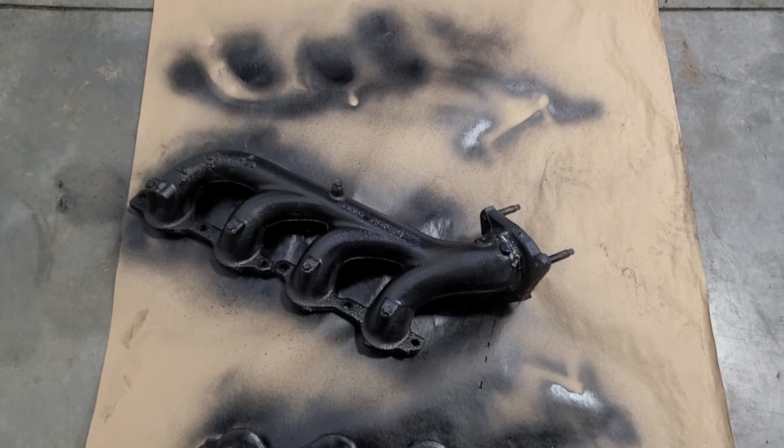Anyways, I'll give you a little walk around and start on some things to keep progress rolling. So these are the manifolds. In case I don't get that video back, I cut the flanges off on a wedge shape, reoriented and reclocked this so it doesn't hit the frame rail, and realigned them so they basically work for my application. Then I just threw a quick coat of header paint on them that I'm sure will only last like 5 minutes, but that's okay.

They're welded inside and out, 2 passes on each one, MIG welded. These are cast steel, so not cast iron, so as long as you clean up the area, you can weld them fine with just a MIG welder and get good penetration. My drive shaft is here.

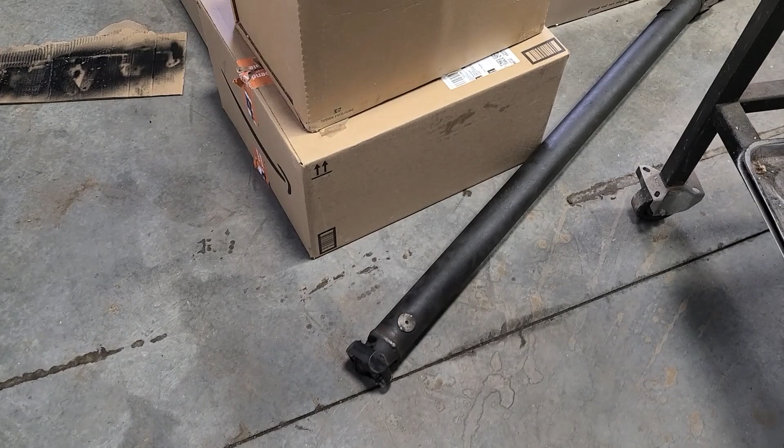I should jam that in because it's in the way. The only thing I had to do was, while I was away, I had a friend of mine get a conversion joint for it, and he put in the conversion U-joint, so it converts it from the size U-joint that was in the truck to the size for the LS.

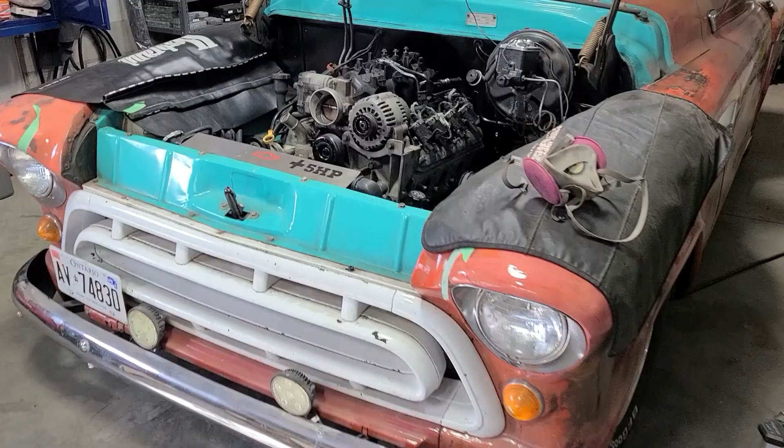Lots of parts, my harness stuff, which I think is what I'm going to start on. This is all my fuel system, fancy dash, shifter, that sort of thing. What I did do that I didn't record was the radiators installed, accessories are on. I have clearance from the power steering pump pulley to the power steering box, so that's good news, that's really good news, actually.

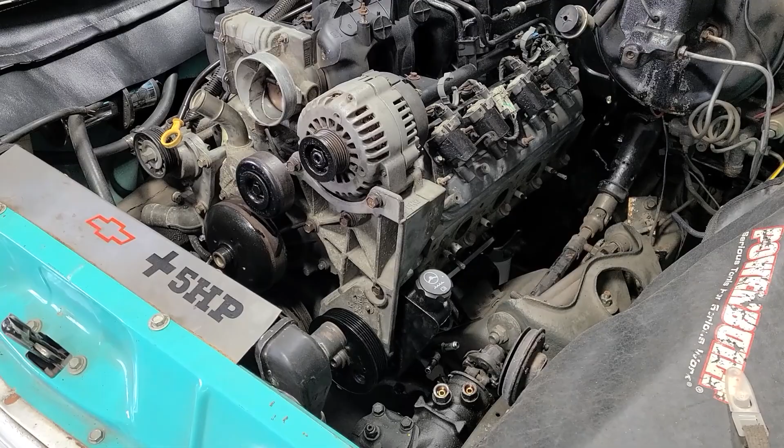Like I said, the manifolds now fit, so I really need to start tying this together. Lists are very important, I have a giant list of things to do. They're very important to keep you on task, and I guess I will just keep working.

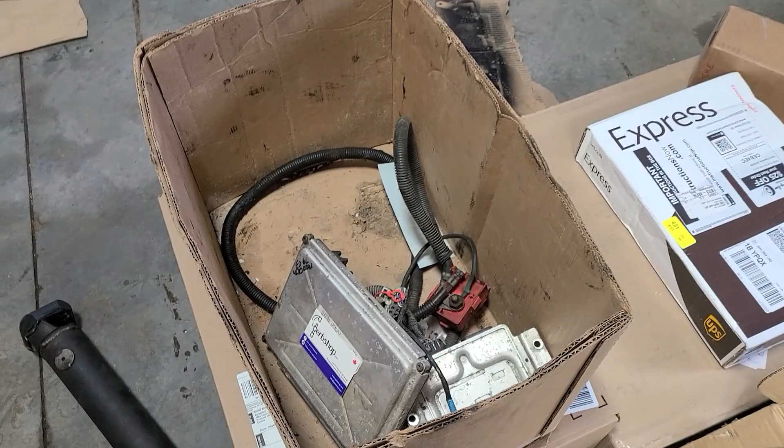This is my harness all stretched out. This is the harness that I had reworked by a local shop that's all they do. I've got a nice fuse box there. You can see I've got to clean up all these things and get ready to install them. I just got to start figuring out where all this stuff goes, which is kind of going to be fun.

I think a nice easy spot to start would be, I know all these coils have to get plugged into something, so I could start there. I don't know.

Yeah, I got to figure out where that's all going to go, and this is for the engine specific harness. This is a factory harness that's been reworked for my application, but I still have the engine harness, and then I've got to make the stuff from the truck work. So I know that doesn't really sound very clear, but the big thing is to lay this all in, and then I've got a little instruction sheet that tells me what I have to get power to, what I have to ground, all that sort of stuff. It doesn't really look like there's that much to do besides find out where all this stuff plugs in and plug it in.

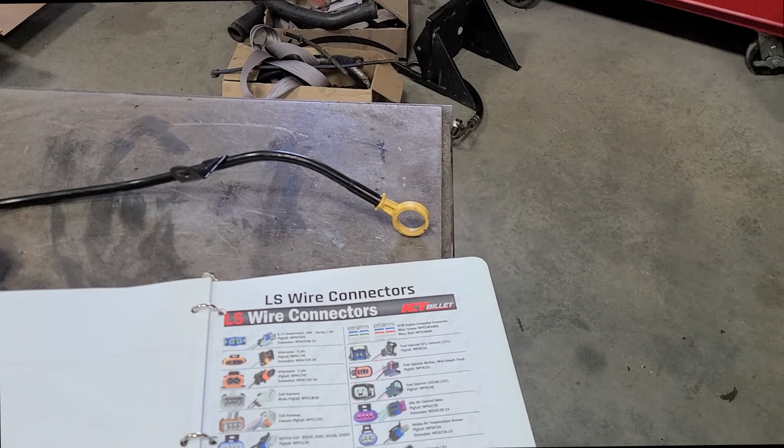Okay, so one thing that will come in handy, if you go to the ICT website, ICT makes a lot of good products. I have nothing to do with them other than I buy their stuff sometimes. They have this complete LS swap guide by ICT Billet that you can download and print. In the back of it is what all the connectors do. So this is very helpful because I have zero idea what I'm doing.

My last swap, the harness was already done for me and on the engine. So what I need to do is, or what I needed to do was find one spot to start.

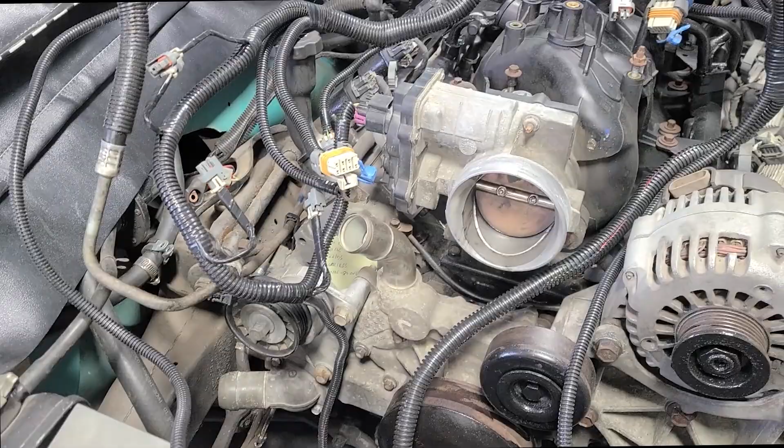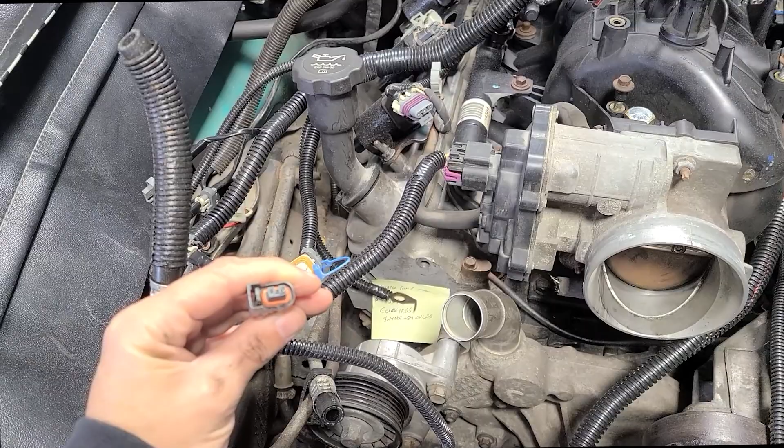So the one thing that was easy for me to find was the drive-by-wire plug. These little guys are for the injectors, so that would make sense. Now I can work my way back. This might not be the right way to do it, but this is the way I'm going to start anyways. The injectors each have a plug, so now I can work my way back and dress this through this loom, or through this deal here.

Presumably my coil, that's probably my coil connector, that goes right here to my coil pack setup. So I can work my way back from here, and then I can see which way the harness is oriented and work my way around.

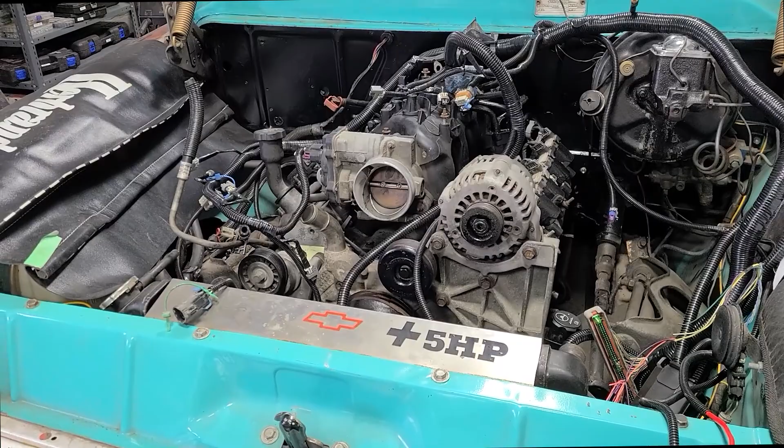It looks like my harness has been laid out for the computer and fuse box to be on the driver's side. I didn't specify that one way or another, probably should have. But there's enough loom, I can probably make it go wherever I want. I'm going to get everything on the engine first and then decide what I need to do to mount the harness, the computers, the fuse box, and all that stuff.

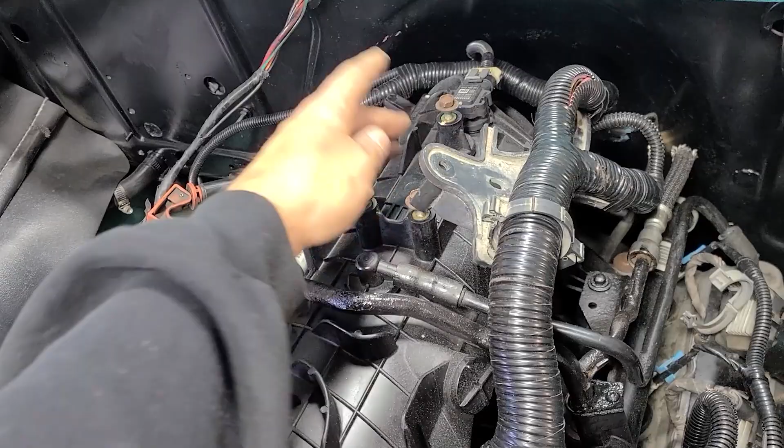Okay, so I'm making some progress. The good thing is I took some pictures beforehand, which was helpful, but things have changed, so it's not exactly the same. I've got the injectors all connected. I don't know where this main loom goes. This thing here bolts onto one of these somehow. I gotta figure out how that goes, and that'll determine a lot of stuff.

There's a pigtail that goes down to the transmission, and a whole bunch of stuff for the transmission. There's one that plugs in on the back of the manifold. There's a temperature, I think that's a cylinder head temperature probe there. I think I found the drive-by-wire one, and there's an oil pressure thing I've got to plug in. It looks like this guy. I gotta find where it goes.

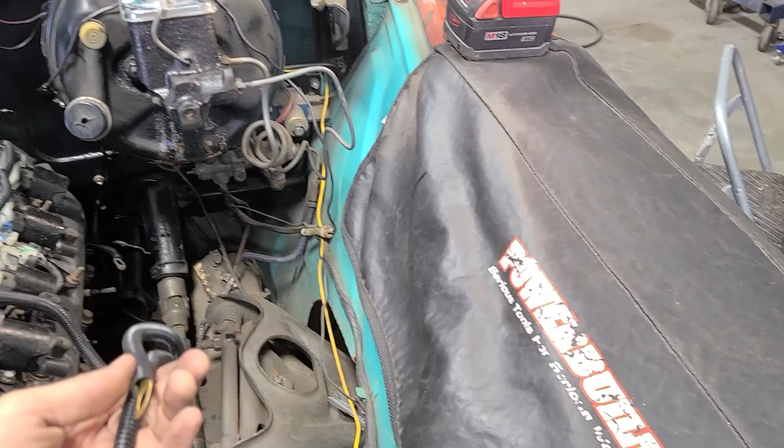So I think I'm gonna put the truck up and look underneath and maybe start doing the underneath connections. Other than that, this guy here, this long thing, I think is the mass airflow for the air filter, on the intake, I should say. So it comes together pretty quick. This is for the O2 sensor, there's one on each side.

The big thing is picking a starting point for me. I picked a starting point at the throttle body because that was easy, and I worked my way around. I found where the harness clearly goes down below. Even if you don't use the specific guy I used, there's a lot of guys wherever in your area that can do this sort of thing with harnesses, and they kind of rough them in and set them up. My Malibu one was similar, but the only difference was it was already on the engine when I got it, and I picked up the engine running. So this one's a little different situation, but it was also cheaper.

So I don't know what this is. That obviously is a ground of some sort. My plug-in for my harnesses, my nice little fuse box he gave me. So I'm going to put the truck up and connect the stuff that's underneath and try to get it out of the way. The one thing you want to be mindful of is exhaust. Where's your exhaust going to be, right? You don't want your exhaust touching these wires, and you want to dress it as tidy as possible.

I've got to figure out, like I said, how this goes. I can't really see it on the before pictures I took. So I may have to get the little bracket that goes here for that intake cover and look at it, and worst case, get it with the Google.

So this is underneath the truck. This is all my transmission-ish stuff. I gotta figure out where that oil pressure guy, this guy, where this guy here goes. I don't know, I don't see a spot for him, but I'm sure there is one, I'm just not seeing it. Maybe this gets plugged into something that looks like an oil pressure type thing, a different type thing.

So let's just look for the obvious examples. There's a round guy, got a round guy here. Get a light closer.

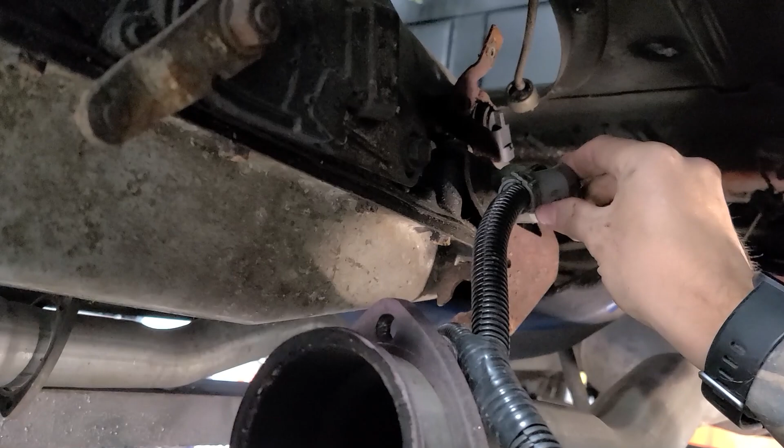So I'm going to look for the obvious examples, and I'll take the round guy. How does that go? Is there a right way or a wrong way? Yeah, it only goes one way. That's the nice thing about a lot of these connectors, they only go one way. And when they go on there's a nice little pop, of course I won't be able to show you that.

Let's see if I can get this guy. You don't want to force any of them, because if they're not quite right, then they're not right. This one should go on just like so, or not. See, it's okay, it has a little tab on one side, not on the other.

So now look at that connector. Oh yeah, it's got a tab on this side. So that's what I'm saying, they kind of only go one way. Bang, hear that little click? And then this wire here probably goes to this one.

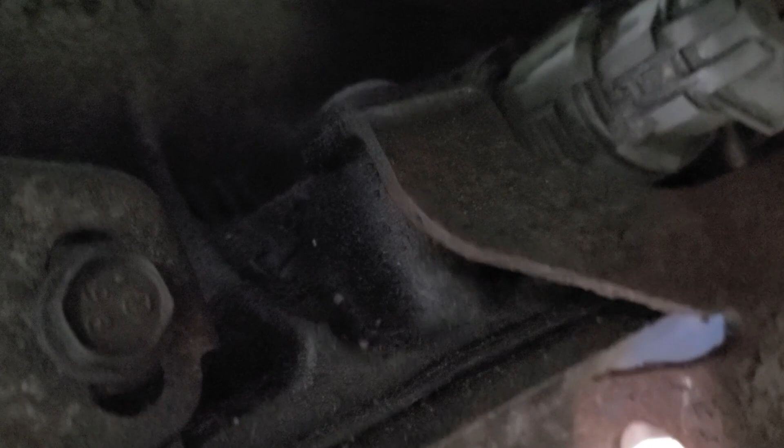Making you all dizzy. Looks like, I don't know what it does, but it looks like it goes in here. Yeah, it goes in with a nice little click.

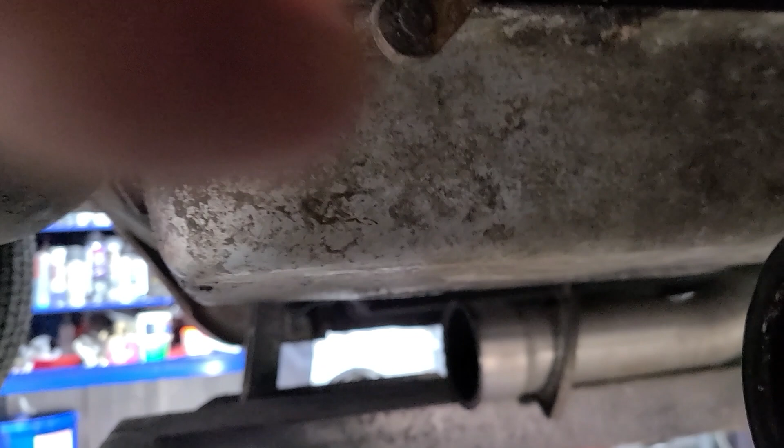There's the main plug. The main plug goes on, looks like it goes on like... nope, see those, you don't see, because it only goes on one way. Those little nubs have to line up with the slots, so it doesn't go on that way. It goes on this other way. Should be a nice little click when it's in right.

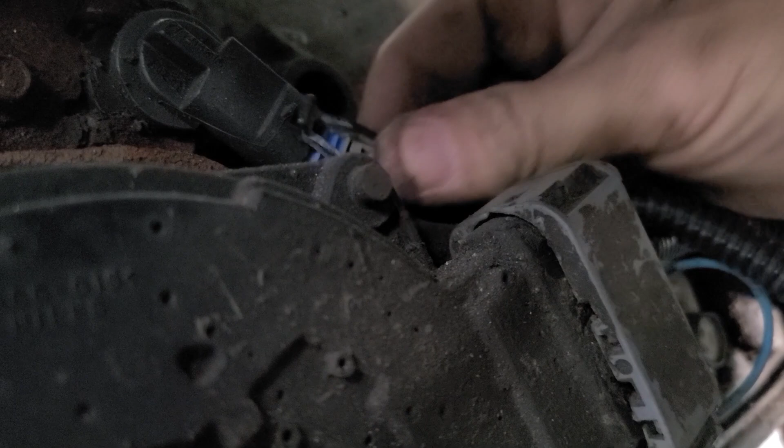Oh no, this one's got this guy here. So you push this in and you push this up, and then it doesn't come off. Isn't that handy? What else we got? We got one more up here, and it's nice to know what these things are, but I don't know what they are. As long as it's only a problem if you're missing something.

So this guy, that's the transmission plugged in. Transmission's completely plugged in. I'm just going to get this last one, you can see where the loom goes. And once the exhaust is on, you want to make sure that's all clear and not a problem. I can get rid of this because this is the old speedometer cable that's not needed anymore. So that's the transmission hooked up, like 4-ish plugs.

This guy here, what's this guy do? Oh, that's the O2. I'm pretty sure that's the O2. Yeah, that's the O2 sensor.

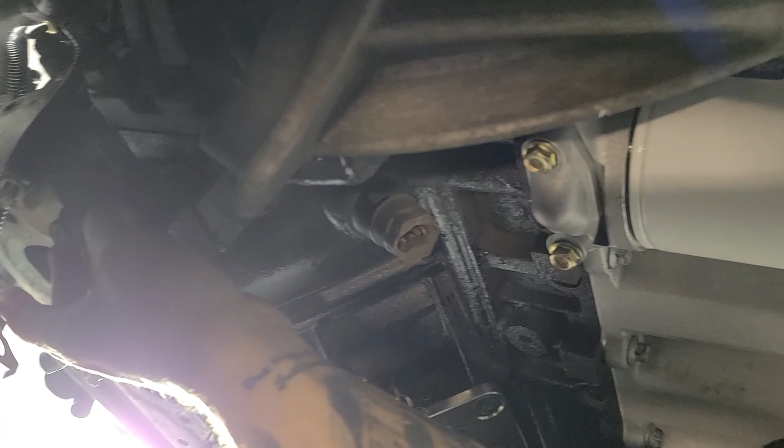These are like a triangular type guy. So, I don't know where, the only one I haven't found yet is this one here. I haven't found where he goes. I do see there's a nice spot. This is going to be confusing. So I haven't found where this guy goes yet. I'll have to look, but I see there's this ground, there's a stud back here that it can go on. So I'll probably put it on there.

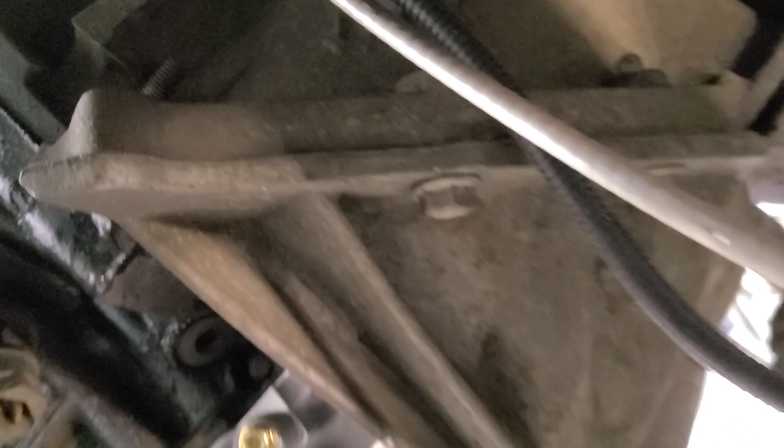When I install my shifter, it'll get connected to this. This is, I guess, I don't know what they call it these days, but I'd call it like a Prindle switch, your park, reverse, neutral, drive, low switch. That's what controls your thing going in and out of gear. I have a mechanical shifter that's going to directly connect to that, so that'll be interesting to see how that goes. But that's the transmission hooked up.

This O2 is going to plug into the O2 sensor on the exhaust. This is really not that hard. Now I did pay a bit of money to have this harness pre-done for me, so that was handy. What I spent, I'm saving in time, and I don't have to be an expert on LS wiring to plug things into where they go.

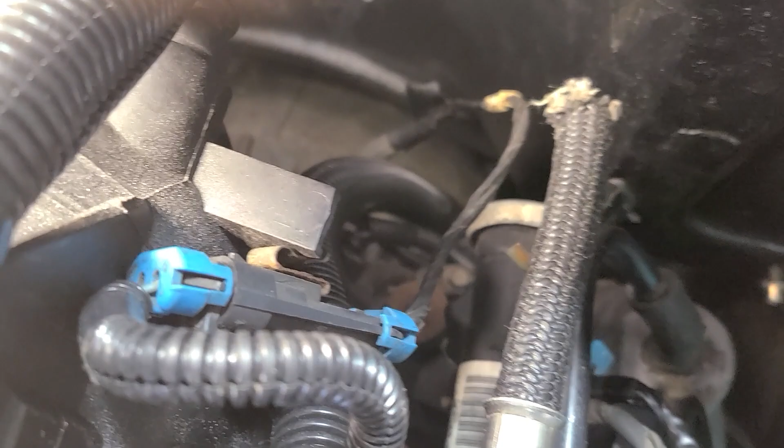Okay, I found where this oil pressure switch is. This is the back of the intake manifold. You can see I had this one plugged in, this 2-wire, but then there's an oil pressure switch with no plug in it. And the plug that I couldn't find a home for, that's right here, is that same size. There's also a stud back there to put that ground on that I had.

It's important not to leave it, because that little wire is really easy to connect, or to not connect and to miss.

And then if I went to go start it, maybe it wouldn't run right, or it's certainly not going to read oil pressure. I'm going to think I've got no oil pressure. That's a bad deal, especially when I was into the oil pan and stuff like that.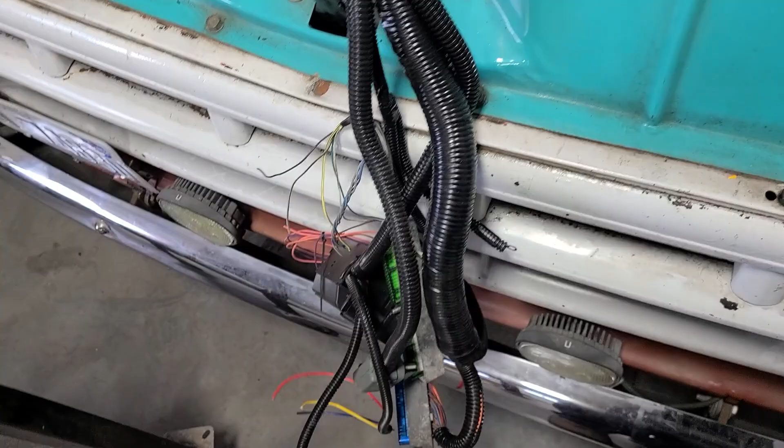So I'm going to plug that in now. It's important to not miss anything and make sure that you plug everything in. Once I get that and that ground back there, that's pretty much the entire back of the engine other than the O2 sensors. Then it's just all this crap up here, which looks like a lot, but it's not really, because this plugs into something, this plugs into something, that plugs into something.

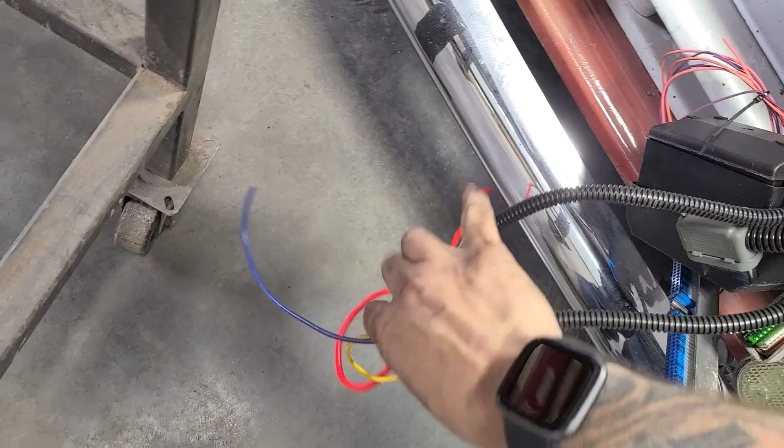Then it's just this, all the wiring. And these guys, some of these go to my OBD port. I gotta put the port on - he gave me one to put on. It's kind of nice that he did it this way, even though it's a bit more work for me, that he gave me the wiring for the OBD port and the plug so I could install it in the truck. Because what I had to do with my Malibu was the plug was already on it and I didn't want to screw with it, so I had to use a big hole to get it through the firewall to mount that plug. So it's easier this way - I just have to have a hole the size of these wires.

Now if you've been following the build on this truck, you know that I'm not short on holes in the firewall to put wiring or whatever the hell I want through. So that should be okay. But I'm gonna get that oil pressure thing hooked up, get that ground on, and then really it's just figuring out how this sits on top of the engine properly, because I might have to just Google and see how that goes on this particular truck engine. And then once I have that, I can decide where this harness is going to naturally lay, which I'll have to build a shelf or something to hold the computer.

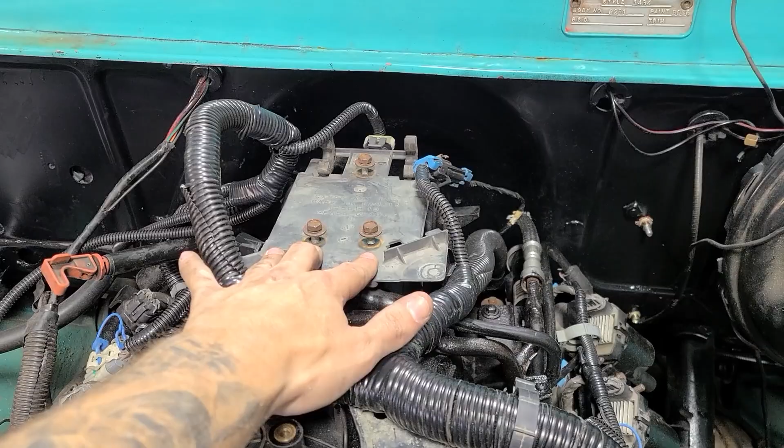Okay, after some Googling and looking at pictures and trying to identify what's what, it goes like this. This bracket goes up here. This is the bracket for the cover, and the cover just clips in and goes down and then screws into this.

So I need to clean this up because it's still cruddy. Clean this up, and then it looks like everything for the computers and stuff is going to be in this area. Which is fine actually, because I think I have less room on the other side. The battery goes up on the firewall in this truck, so it's not too bad that way. But I'm going to have to build some sort of area or something for stuff to sit on, like the fuse box and all that stuff.

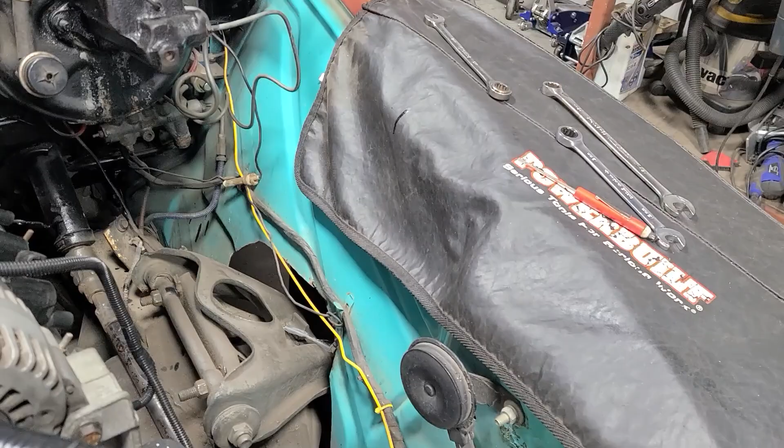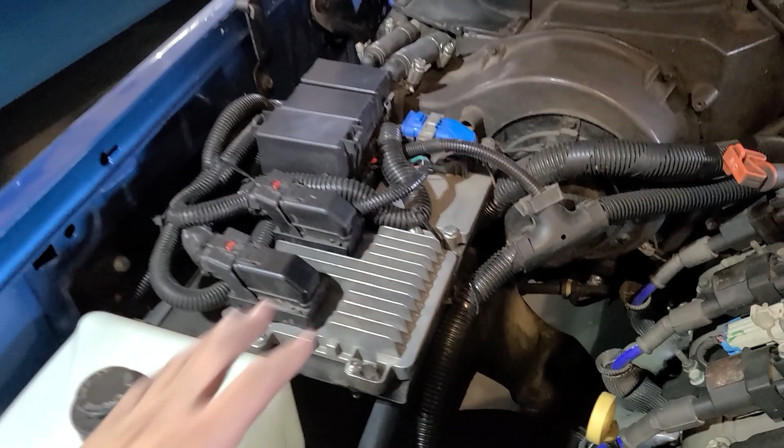On my Malibu, I did a shelf. Actually, let's go over and I'll show you what I did on the Malibu. Okay, this is my 1981 Malibu with a Gen 4 LS, a 5.3. You can see everything is very tight in here, but I built this shelf. It's a Gen 4, so I guess it had the same amount of things, just a different plug configuration. It's got the, I believe this is the engine computer, and that's the transmission computer, and then this is the fuse box. I did a whole series of videos, like 30 videos, on putting this car together.

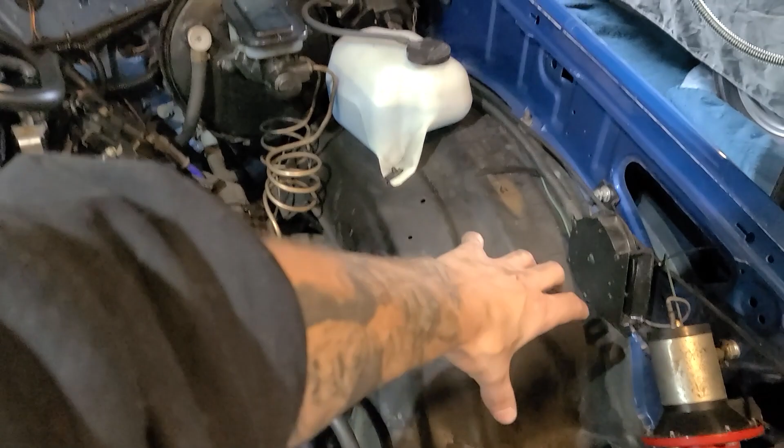But this shelf here that I built is probably something like what I'm going to have to build for the other one, for the truck. You can see on this one, the harness comes all over here and sits nice and tidy. This other one is set up like the factory location, so it'll come across and behind the alternator, and I'll probably put stuff over here. You can see on this one, I didn't have a lot of clearance - I've got 3/8 of an inch between the pulley and the steering box. I don't have that issue on the truck, but I'm using the same pulley, the smaller reduced pulley, and stock accessories, the same as I did on this Malibu.

Now things are starting to make sense. So I cleaned up these brackets and put them on. Sort of all fits. This guy here, this computery looking box deal, whatever this is...

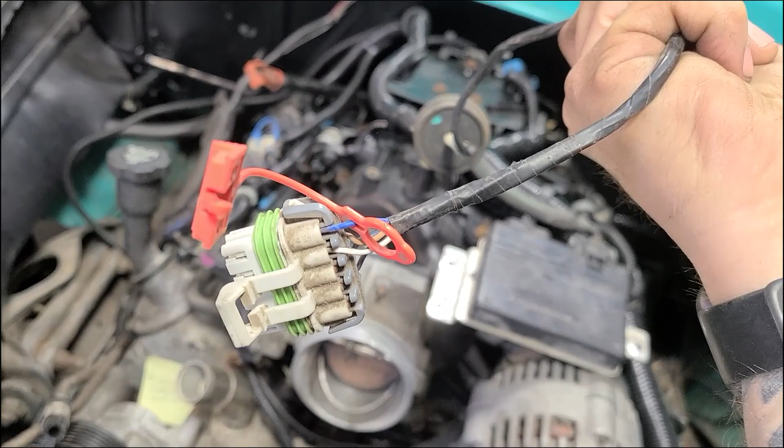This plugs into my drive-by-wire pedal, this guy. This grommet obviously goes through the firewall somehow. So when I'm positioning where I'm going to mount this, it has to be within proximity so I can get it, basically make it to the pedal without having to splice wires. That's the easier way to do it. This guy here is going to go probably to this, yeah, it goes to this. So I've got the length of this and the length of this to get me to the pedal.

So if I mount this box somewhere like here, I'm probably fine. So I'll probably do that. It's sort of naturally kind of laying there.

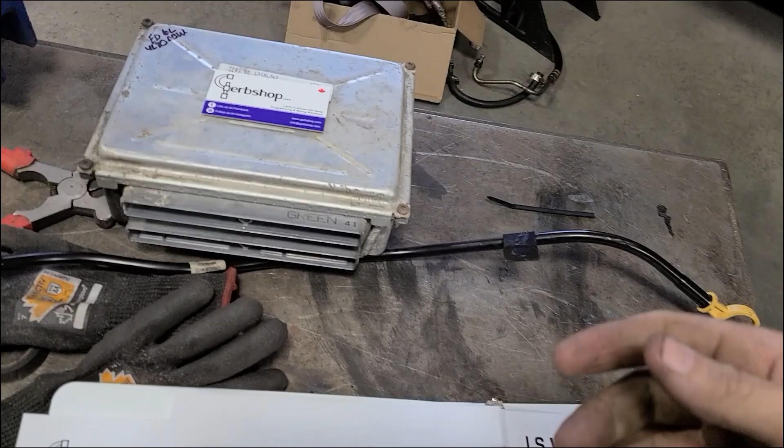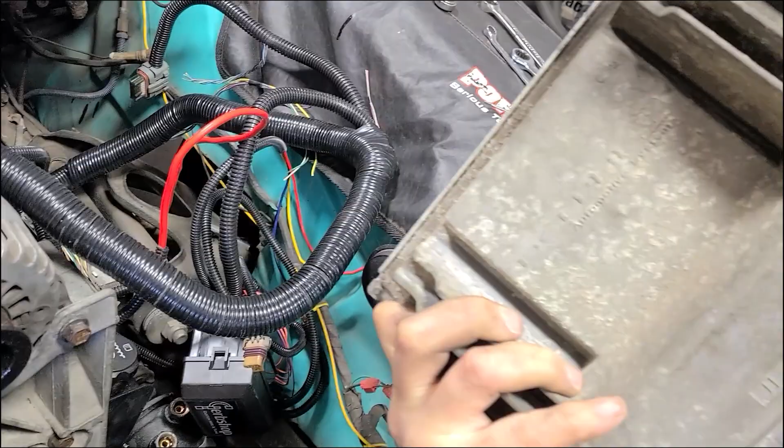This guy here, these guys, plug into the main PCM. So I have to mount this PCM somehow. And I don't see any holes in it or anything, so that's kind of confusing. I'm not really sure how I'll mount this guy so that it's going to actually look okay and be secure and all that good stuff.

So I have to mount that. It's going to go somewhere in this area as well. And then this fuse box will go somewhere in this area. I'll have to figure out... Oh, I think I decided this was the...

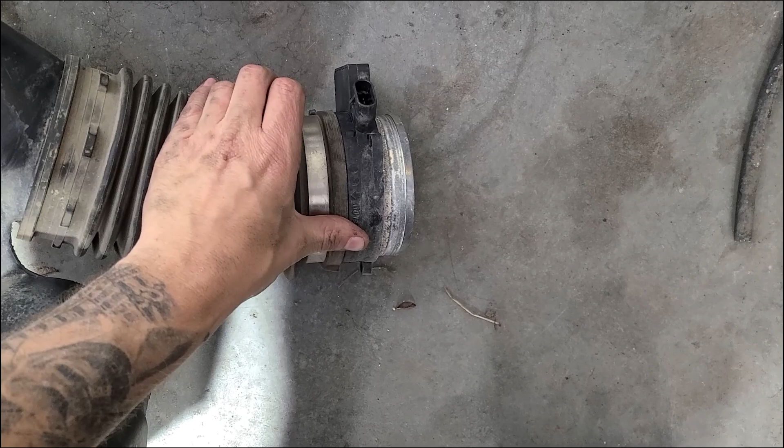Yeah, I think I decided this was the MAF, the mass airflow, which is... let's look at it. This is the factory intake. Yeah, so this is the mass airflow here. So if I'm building an intake like I did on my Malibu or something, I have to incorporate this mass airflow in there and then plug that in.

Or, you know, I could repurpose this big giant plastic air filter. The downfall with the open air filters is they sound like crap to me when you honk on it. It sounds like the old school flipping the breather upside down on a 350 Chevy or something. But the upside is they look good. This doesn't have that sound, but they kind of look like crap and they take up a giant pile of space.

So I'm not really sure what I'm going to do there. Probably I'll just make something like I did on the Malibu. As for performance gains, I don't really care. You're going to get a marginal gain for having an open air filter versus having this. For this application, it's not a race truck. It's going to have way more power than it was ever supposed to have anyway, so it doesn't really matter.

So that becomes the hard part. What I'd like to do with this, which is what I did with the Malibu, is put the rad hoses on first, because the rad hoses are a little bit harder to deal with than the intake, and then you make the intake go wherever it goes, wherever you have space left. But I'm getting somewhere with this, so that's okay. That's good. And then I have to get the cover.

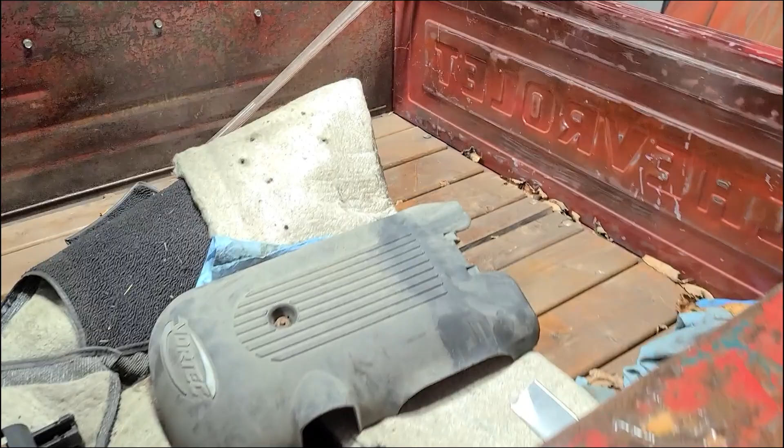This cover here, see, it just clips into that back piece and folds down. So I'll clean this up, and it'll be nice that I can actually fit that on this one, because I couldn't fit that on the Malibu due to hood clearance. But I'm making one for the Malibu.

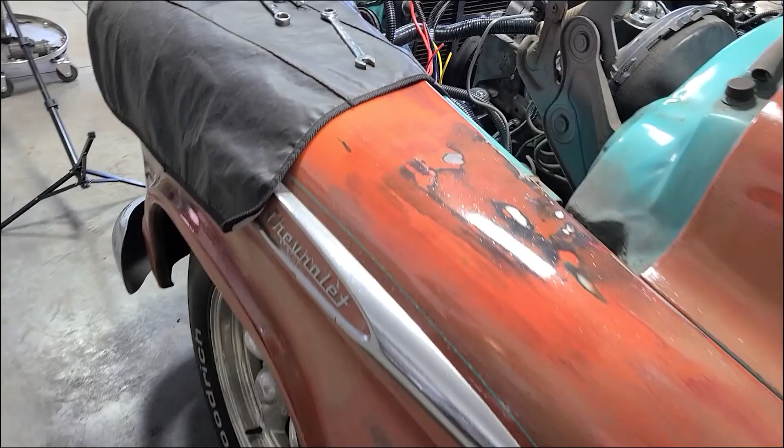It's coming like Christmas. So I guess the next step is to just kind of figure out where I'm going to put stuff now that I've got things kind of sorted. I know what things are now. Process of elimination is a wonderful thing.

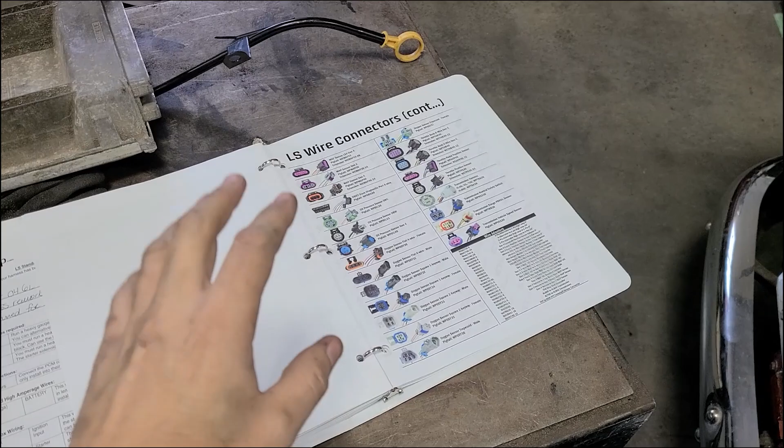I can't recommend this enough, this ICT book. Like I said, the only thing I bought from ICT is their engine mount brackets that are down there. However, they were my go-to stop if for whatever reason this power steering thing didn't have clearance. I was going to get the whole bracketry that moves everything inboard. You can see my crappy paint job.

So I guess I'll keep looking at where I'm going to put stuff.

Okay, so I have the wire running for the drive-by-wire pedal. I made a grommet that goes down in there. This is sort of got this kind of figured out. What I think I need to do, I don't know how I'm going to get them out. These screws are pretty seized in. I need to get these screws out.

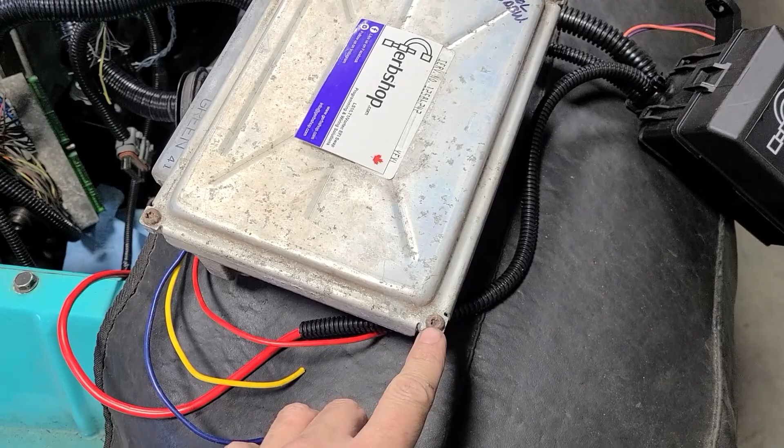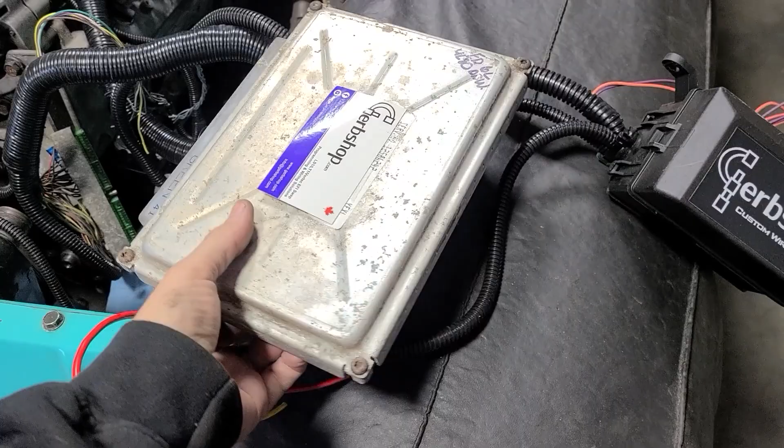I need to make some sort of bracketry with the sheet metal on my brake so I can mount the PCM somewhere right there-ish or something. Once I make the brackets, I'll be able to determine better, but it's not like the Gen 4. The Gen 4 has holes that go through that you can use to bolt. Gen 3 is different, so I'm not sure how this would have went with factory, but I'm going to try and get these screws out, and then I'll make a little bracket for that to mount.

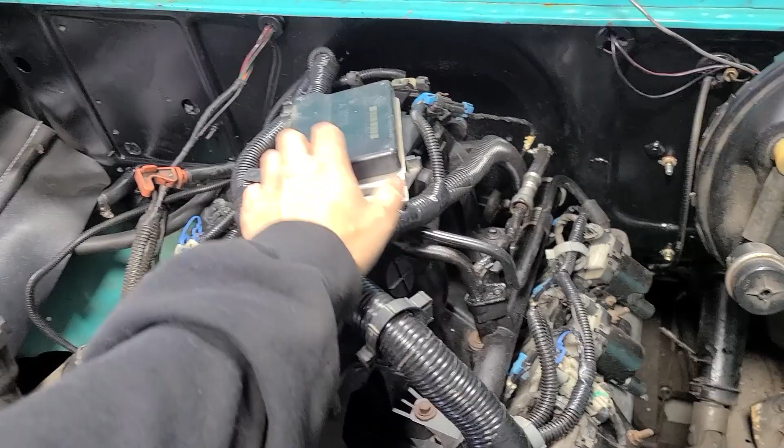This guy's easy enough, it can just mount anywhere. That's for the drive-by-wire pedal. And this fuse box just has a couple of holes in it.

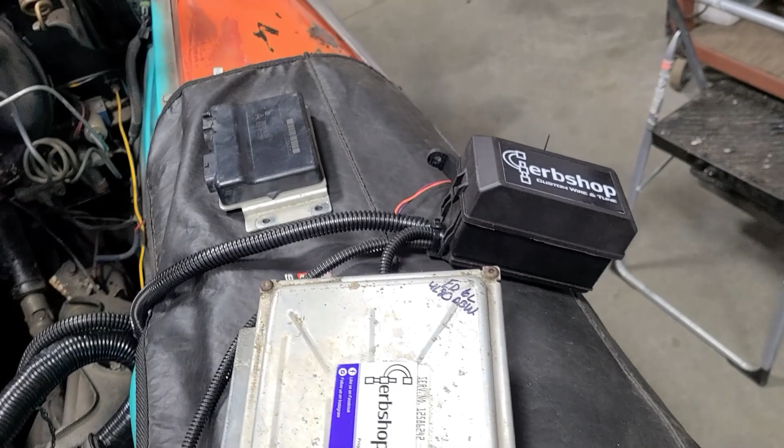So not sure how far I'll get on this video, but I'll keep going and I'll stop when I stop. I certainly won't get it all done. But fortunately, the guy gave me a nice set of instructions. It tells me what it is that I need to do for the various things, some hints and tips.

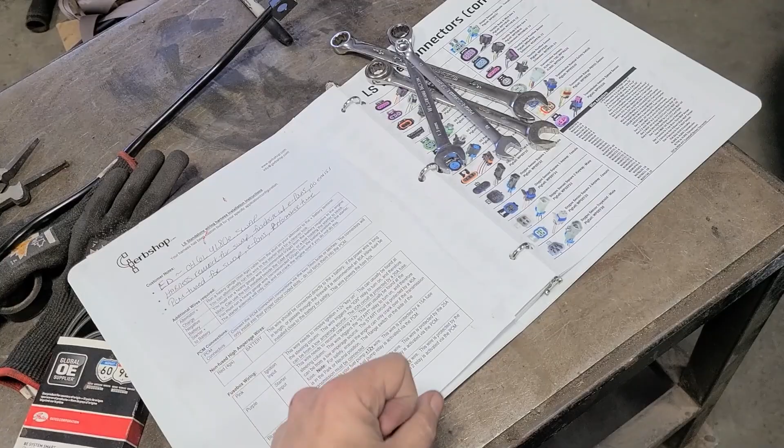The guy that I got this from, which is a different guy than the one I got the one for the Malibu from, also gave me a set of instructions. Not quite as pretty as this, but also a very good detailed set of instructions that was obviously a contributor to my success. So I'm going to try and get these out and figure out a way to mount this.

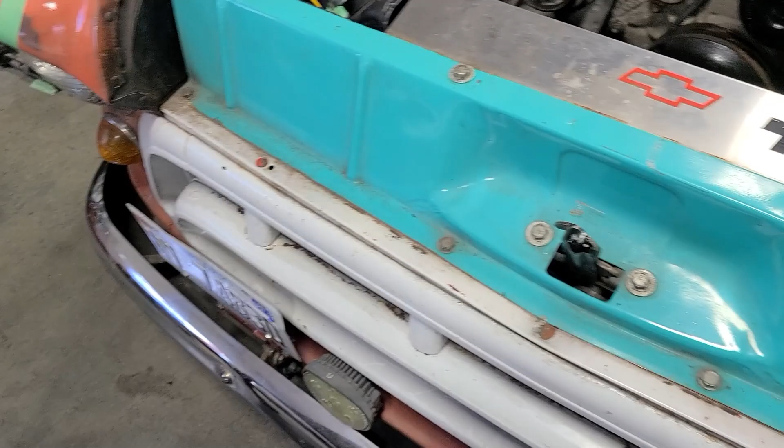And so this guy here goes, let's just look at that for an explanation. So the wires that we have, the fuse box wires, this big red wire - 14 gauge, no, that's not 14 gauge, it's bigger than that, it's 4 gauge.

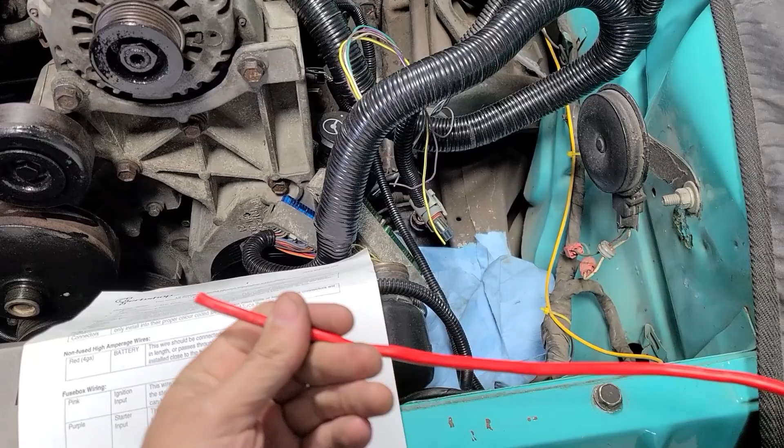This non-fused red wire says to connect directly to the battery, and if it's going to be any length, which it probably is, any length longer than what it is, it should get an 80 amp fuse. So I'll probably put an 80 amp inline fuse in it. I'll put that on my note to buy.

That's the wire that powers the fuse box. The pink wire that I've got here is the ignition input. Purple is the starter input. This blue one is for the electric fuel pump output, power to the fuel pump. The yellow is for one fan and the red is for the second fan. So that's very easy.

That's the one for the battery. So just to recap, this goes to the battery, and if it's longer than a couple of feet you want an inline fuse. I put an inline fuse on the Malibu. The pink is for the ignition input, purple is for starter input. My yellow here is for my one fan, red's for the other fan, blue is for fuel pump output.

Now that's going to be different - these ones will be different depending on who did your fuse box, it could be any color. But these ones here, the pink and the purple, should be the same no matter who did it, because that's the GM wiring that's just reused.

The other thing that I've got that he gave me provisions for, let's just look at what this pile is. I'm figuring it out as I'm talking to you. So the white wire he gave me is for the tach. The brown wire is for the check engine light, the MIL light. The green wire goes to the OBD. And the yellow wire is for the vehicle speed sensor.

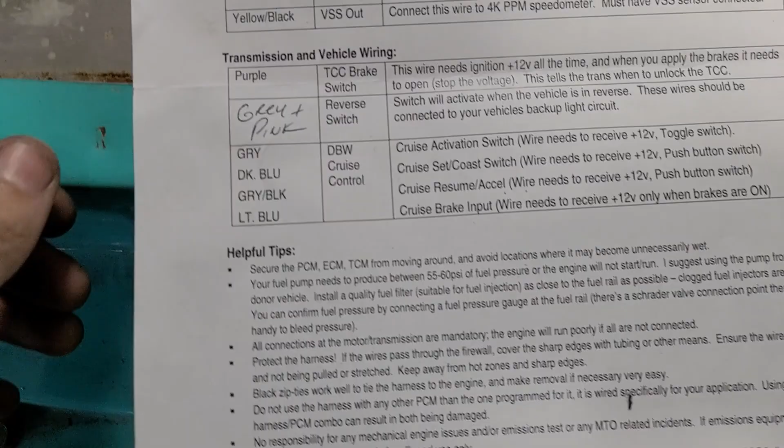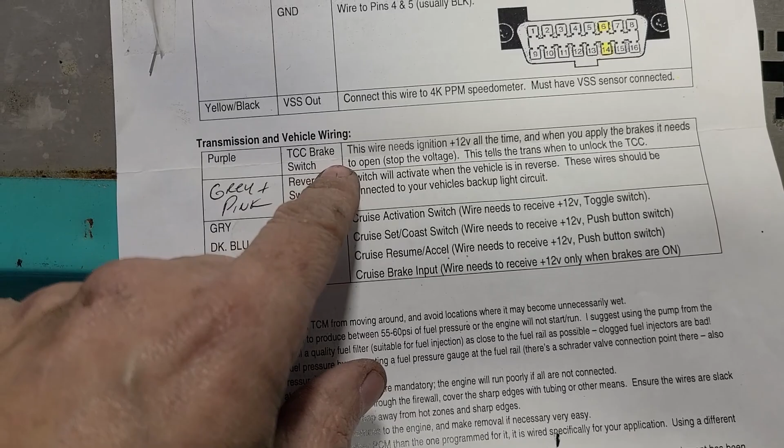Transmission and vehicle wiring. It says the purple wire needs 12 volts all the time. So this is for the brake light switch, or for the brake switch. Reverse lights - switch will activate. These should be connected to your backup lights. And then it gave me provisions for cruise control.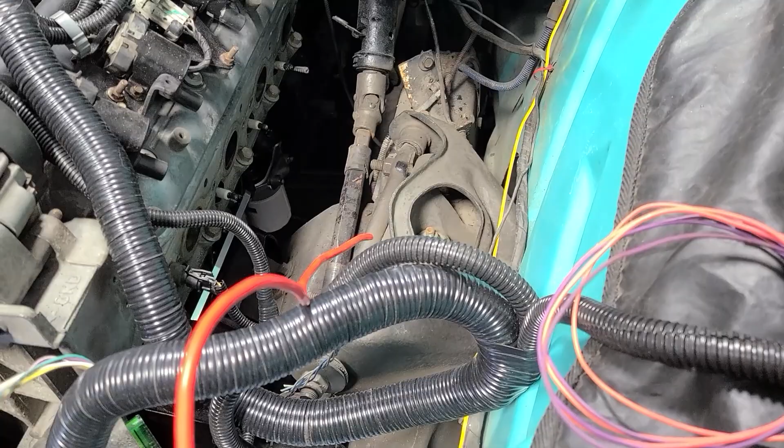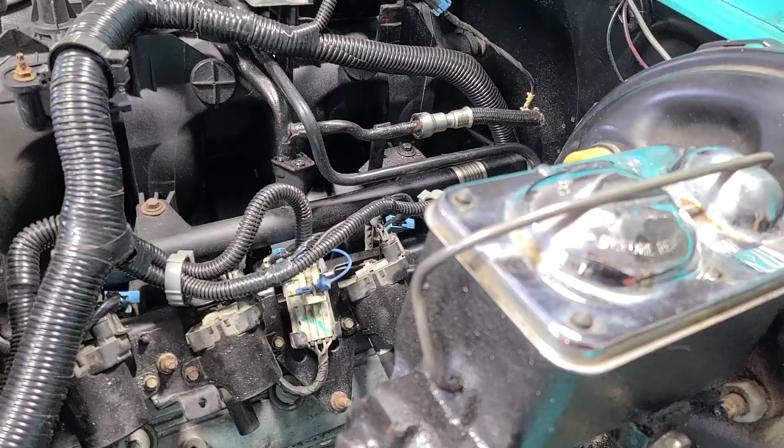So where are those? You guys are figuring it out with me. Somewhere is some wiring that I can't find, that will go into the passenger compartment, and I will connect to all that stuff, but I don't see that. Maybe I have to take it out of here. There's my nice fuse box, relays, all that sort of stuff.

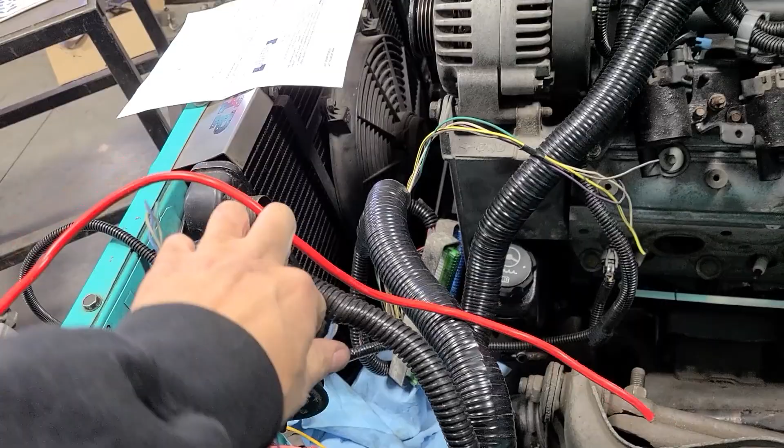Let's just see what I got here. Here we go. Knew there was more wires. So...

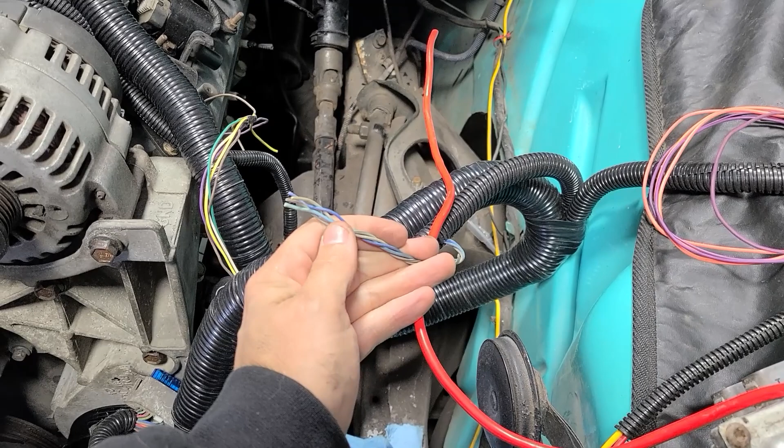This is the cruise control stuff. You've got a gray, dark blue, gray and black, and a light blue. So that's all the cruise control stuff.

So I can get either a generic switch, or I can get one of those factory ones that goes on the column. I did that in the Malibu. So that's that, and those colors should all be the same for any Gen 3 LS.

This is just repurposed from the factory harness, so that's not really changed. The only ones that'll be different are the ones coming out of the fuse panel. They could be whatever color the guy who makes the harness uses. So somewhere there should be a purple wire and a gray and pink wire.

The brake light switch, I've done that before. It just goes to the switch that's on the back of your pedal. I can show you actually.

There's a switch somewhere here. Where is this one? I don't know, there's a switch here somewhere. This guy right here.

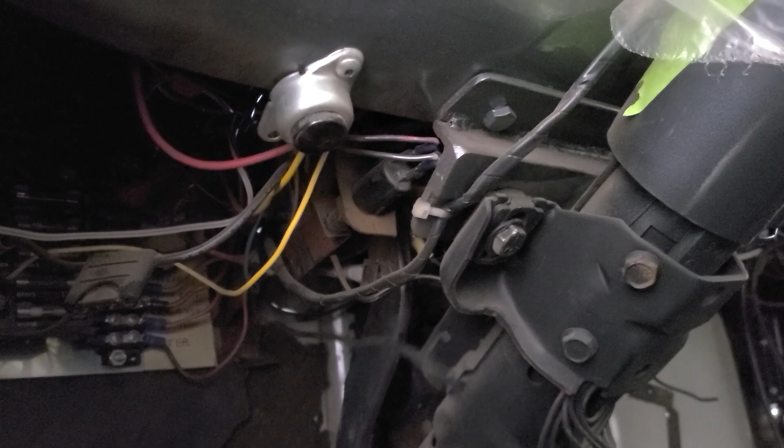When you push on the pedal, it will either open or close the switch. I think it closes - when you push on the pedal, it closes the switch, which completes the circuit and gives you brake lights. So you have to run a wire to that switch from this harness.

I did the same thing with the Malibu, except its switch is down here on the floor or something, and it had a couple more prongs. It wasn't just a 2-prong switch, I think it was maybe a 3-prong.

So I've roughed in the harness sitting there for the pedal, but I don't have this pedal finally installed because I want to pull it out and paint it and clean it and stuff.

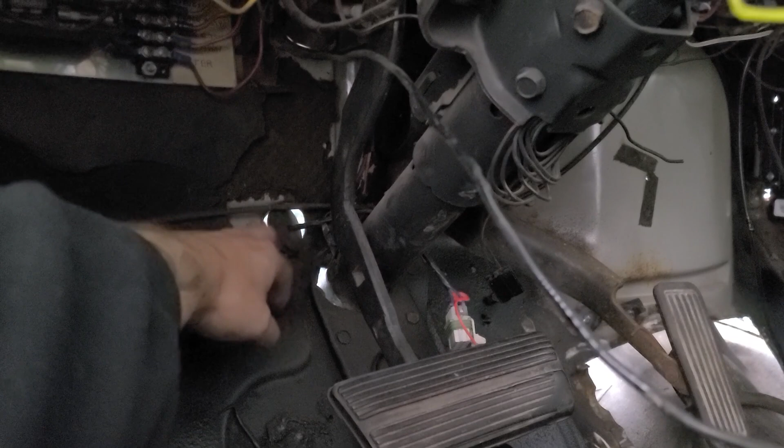Obviously if you've been following my videos, you see that I have a big giant hole in the floor that I got to finish. This is the grommet I made for the wiring for the drive-by-wire pedal, but I haven't finally installed it yet because I'm probably going to run some more wires through there.

And then I have some strip caulk, 3M strip caulk, that will seal that in. And I'll have to seal around here and a bunch of other places. And then one of my other projects is to sound deaden this entire interior.

Hey, there's my safety glasses. This is the temperature gauge.

So that's the one thing that's kind of interesting. With my new gauge setup, it's going to plug into the OBD2 port. My new gauge cluster goes in here, and it plugs into the OBD port, and I don't have to wire for any sensors or anything.

So I'm going to lose this external temperature gauge - this one was here because the one in this doesn't work. I'm going to lose that tach too, maybe I'll put it in the Malibu or something, which will be a whole deal in itself. So I'm going to lose that tach because that's all in my Dakota Digital gauge.

Now the Dakota Digital gauge was quite expensive, and it's specific for this application. So this is the gauges, and it lights up and gives you your park, reverse, neutral, drive, all that stuff. I think it also has, if you buy the sensor for it, a temperature thing for outside air temperature, ambient temperature.

And it's also got a compass. This little extra box here is the OBD2 interface, so that way I don't have to try and wire this thing. It's really all plug and play.

This was expensive, but it's going to save me a huge pile of time. Really, to factor it all in the Malibu, I used one of those boxes that converts the cable signal to electric signal, and that was still a lot of money. So this was a lot more money, but it's a lot easier. It should save me a bunch of time, and it's probably more reliable.

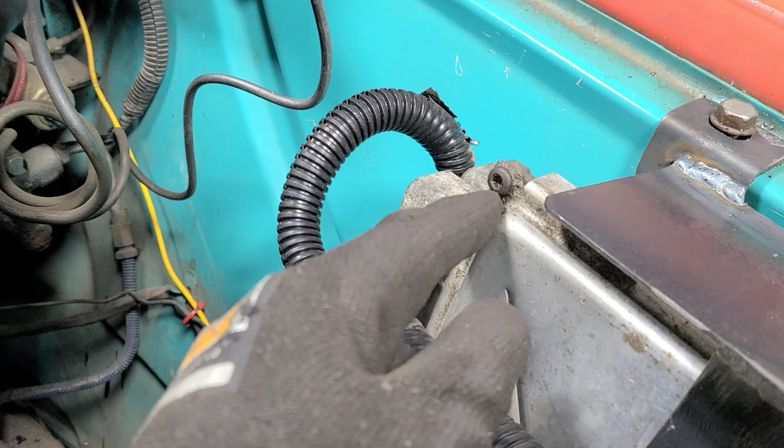Okay, I could not figure out how to get these screws out. Well, I could figure out how to get the screws out, but they're Torx head, and they're kind of stripped and corroded, and I didn't want to screw with it too much. I tried a few things. I made a screwdriver that fit in there, and it was just a nightmare. I didn't really want to get into it.

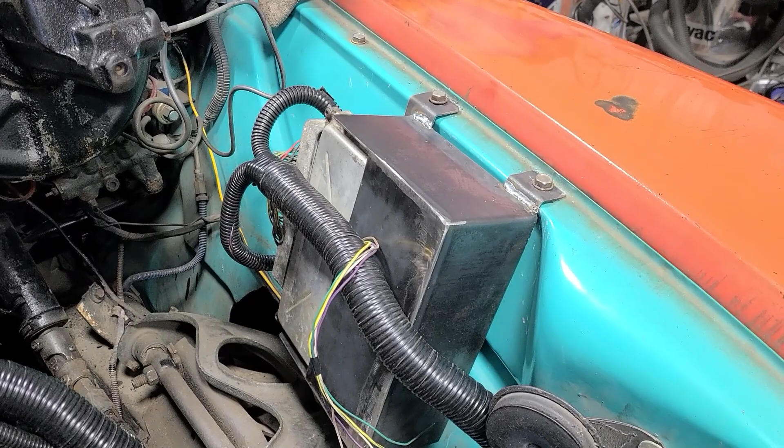So I made a box, tissue box I guess. I bent up some sheet metal and welded some sheet metal and made some tabs and all kinds of things. It should be fine for clearance to the hood latch, which I had trouble with on the Malibu when I made that shelf. It should be fine for clearance to the hood because the hood on this truck goes like this kind of thing.

It should be fine for everything. The only thing that's not good about it is it needs to be painted. I have some textured rubberized stuff that I used on my bed liner floor that I'm going to use on this, that I think will look really good. I don't have to get into fine metal finishing or priming and a bunch of crap, I'll just use some textured finish.

That'll be fine. I'm not sure what I'll do about this. I could get a sticky back little thing and put tie wrap on it. That'd be kind of cool.

I wanted these away from the weather. I couldn't have them upside down because there's not really a way to support the computer, and then you'll have road water coming up and getting it. If I had it facing the front, I'd have potentially water coming in from the top, so still likely going to have water there, but it's a little better, I think.

I think it's the best I could do. So sometimes your best just has to be good enough.

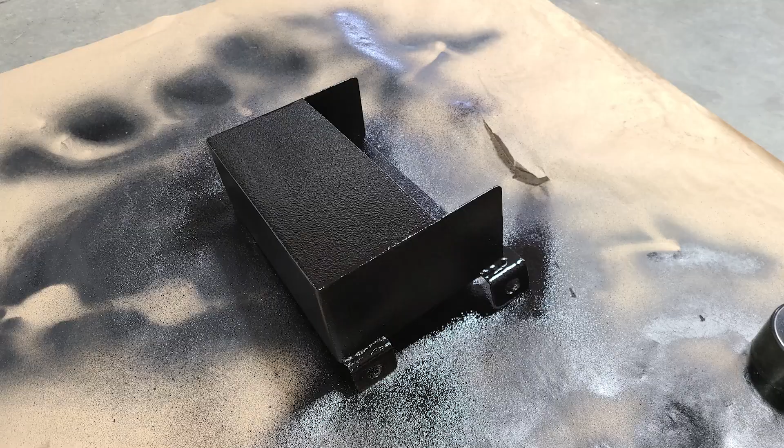But right now I'm going to clean up my mess that I've made, because I went from electrical to metalworking, and I'm going to spray that. It's going to sit overnight, and that'll be it.